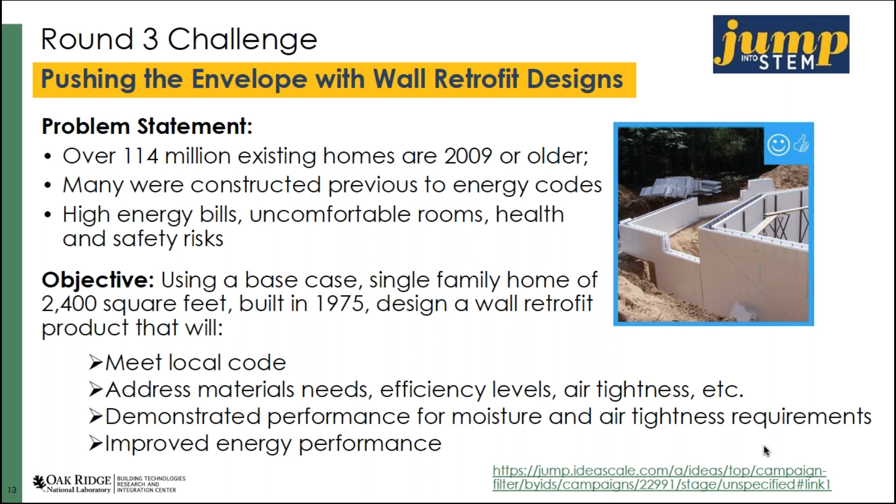So Chiaki, in a few minutes, will be talking a bit about some of the basics on walls and envelopes. This will help you ideate and understand the marketplace out there and the need for solving this challenge.

So what is the schedule for the round 3 challenge? It opened on November 1st. Ideas are due by February 8th by midnight, or 11:59 p.m. East Coast time.

And to help you, definitely review this webinar. This is webinar 1. We've also got webinar 2 scheduled for next week, December 11th at 11 a.m. East Coast time, with Jonathan Benziri from NYSERDA, the state of New York, where he'll be talking about some of their experiences in trying to design wall retrofit solutions for the building stock in New York State.

We will also have a webinar in January. This has not yet been scheduled, but it should be in early January with a practitioner from the field. So check back when we get that scheduled. All of this information will be posted on...

jump.ideascale.com. So with that quick introduction, I'm going to ask Chiaki to speak about envelopes.

But before he does that, let me do a little bio for him. Chiaki is the research engineer with the National Renewable Energy Laboratory, NREL. As part of the Building Energy Science Group, his research focuses on the application of fundamental heat transfer and materials science principles to the development of novel, high-performance building components.

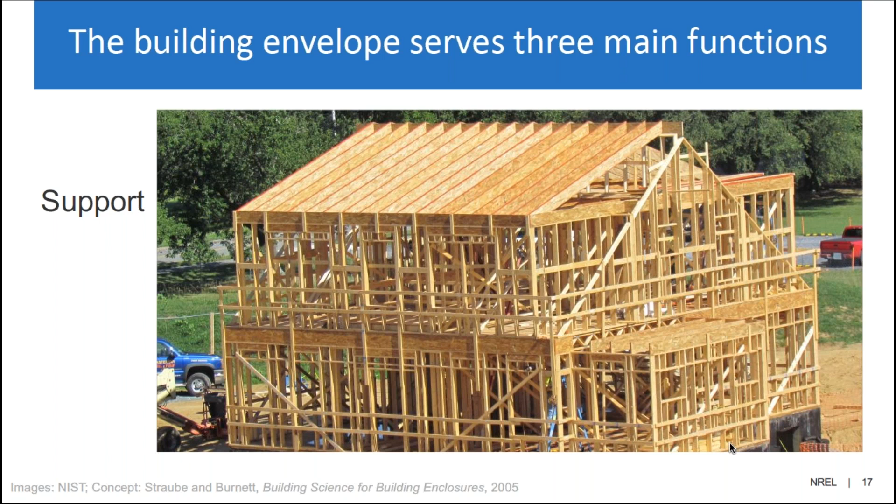The next function is control, the portion of the envelope that manages the environmental loads. It separates the interior environment from the exterior environment, managing the flows of heat, air, and moisture between the two. It's the thing that tries to keep you warm inside in the winter or cool inside in the summer. It really enables the main function of providing comfort inside the home.

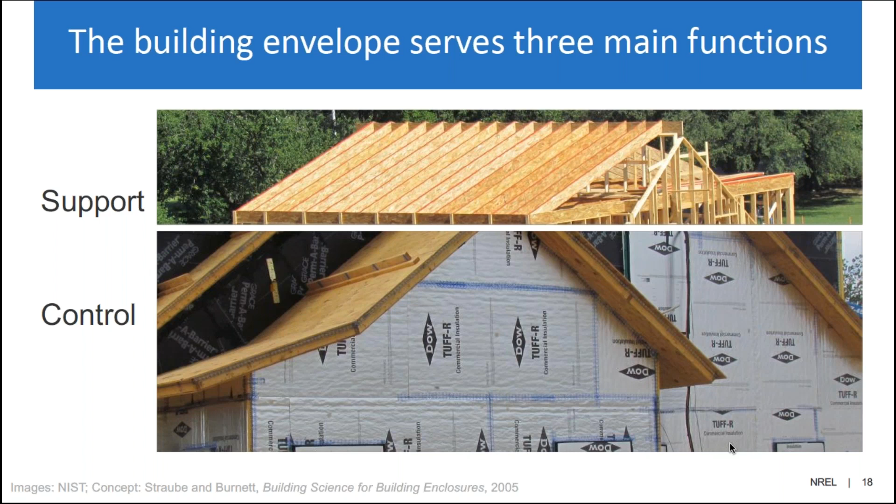The final function is finish—the part you actually see and experience. It's the siding, the windows and window frames, the trim, the roof material, all the things you see when you look at a home or any other building, from the inside or outside. That's the finish component. It's often forgotten in discussions about building envelope energy performance, but it's a key feature because it's the thing you see all the time and appreciate. It provides the architectural appeal of the building.

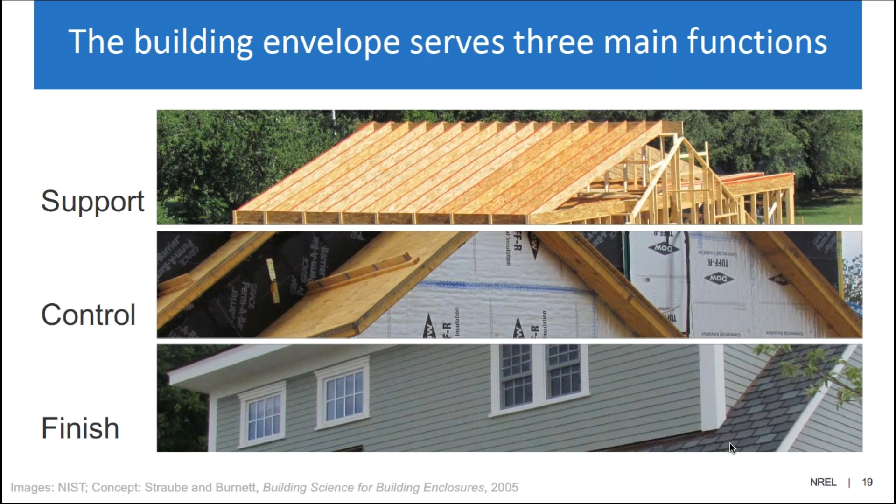Diving a bit more into the control function, that's the part of the building envelope most strongly related to energy use. You can think of the building envelope as the element that separates the indoor environment—the place you spend time, where you want to be comfortable, with conditioned air, cooled or heated for thermal comfort—from the exterior environment: protection from hot or cold air, humidity in hot, humid climates, and solar radiation, including visible light when you want shade, as well as ultraviolet and near infrared light.

It also protects from wind and what wind can bring with it—particularly driving rain and driving snow—as well as airborne contaminants, whether volatile organic compounds (VOCs), particulate matter, or other environmental airborne pollutants that you don't want to be breathing or interacting with.

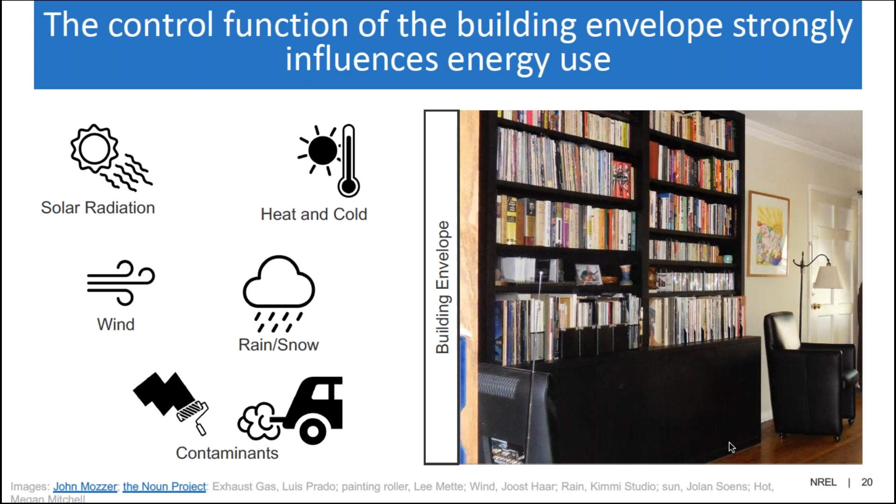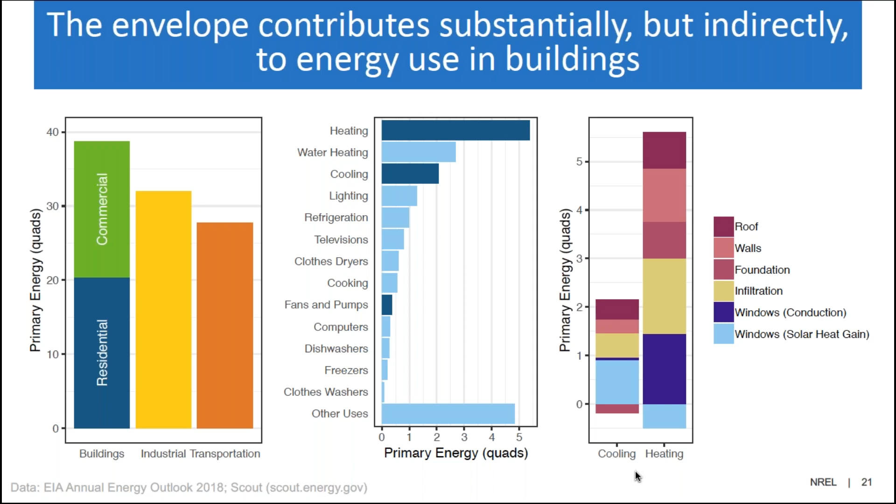All of this energy use associated with the building envelope comes from heat and mass transfer. Both move energy along spatial gradients, from high concentration or intensity areas to lower ones. In heat transfer, that's moving energy from hot areas to colder areas. In mass transfer, within the envelope context, we're thinking about water vapor or humidity, which moves spontaneously from high vapor pressure areas to lower vapor pressure areas.

Going back to heat transfer, there are three primary mechanisms by which heat is transferred. Conduction is the mechanism by which heat is transferred through direct contact between two materials—for example, an electric cooktop with a pot sitting on the burner element. When the burner is turned on and heats the pot, it's heating it through direct contact between the burner and the bottom of the pot.

Convection is heat transfer through air movement. You might turn on a ceiling fan in your bedroom on a hot day to feel cooler—the air movement across your skin is convection helping you feel cooler, giving the impression the space is cooler than it actually is. Convection is also typically used when a fan is associated with some heat source.

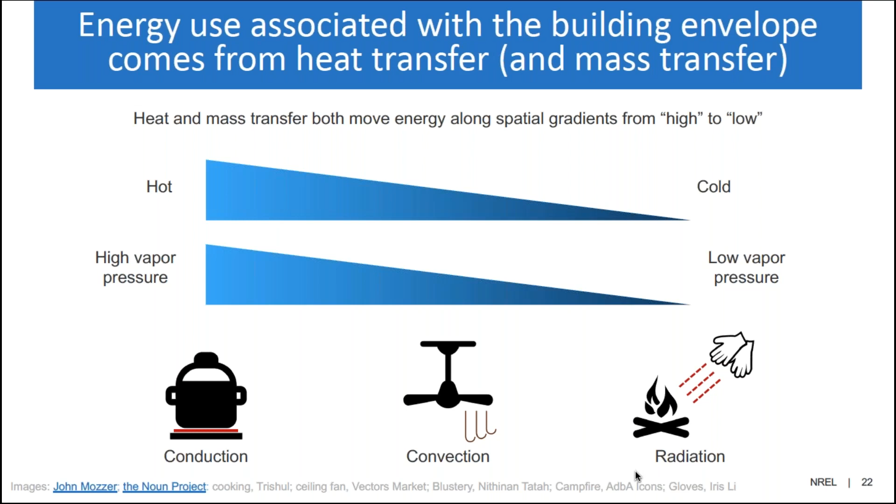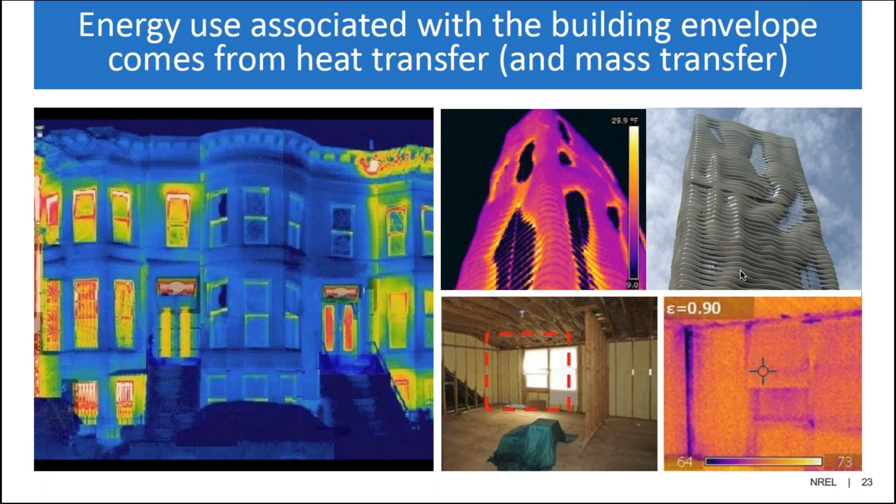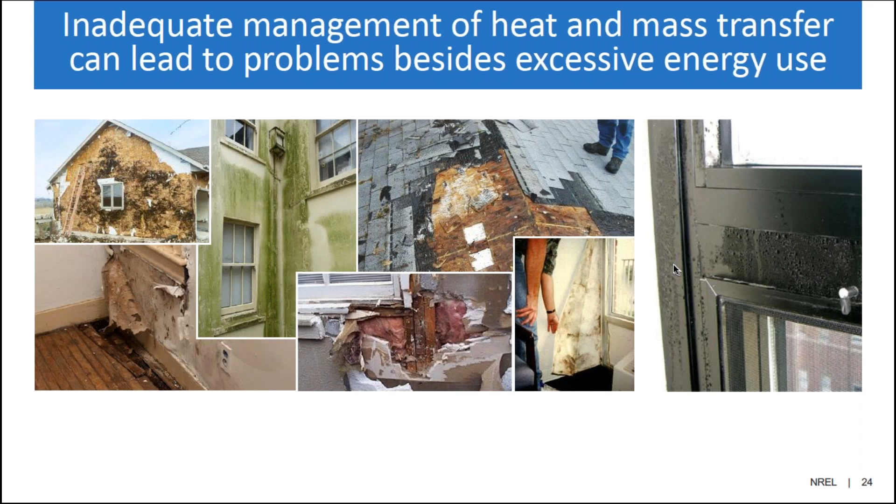So when you're not managing moisture and heat effectively, it can have consequences not only for the structure and physical performance of the building in keeping decay at bay, it can also make people feel unwell. Sick building syndrome is a well-documented problem that occurs when indoor air quality is negatively affected as a result of inadequate control of some of the contaminants inside a building.

When you think about a building, particularly a very high performance building, you've done a great job of insulating, sealing out the outside air, preventing infiltration, and you've developed this phenomenal high performance building. Then you say, well, now we have very small heating or cooling needs because we've kept out all the unwanted heat losses coming from outside. So now we have a downsized heating and cooling system, or we don't run it as often, or we don't have as much ventilation.

So all of the things in the building that would normally have left through infiltration naturally, leaking out through the facade, or being circulated as a result of more regular operation of a much larger heating and cooling system, those are now staying inside the building much longer. And so you can have consequences for the health and safety of the building occupants as a result.

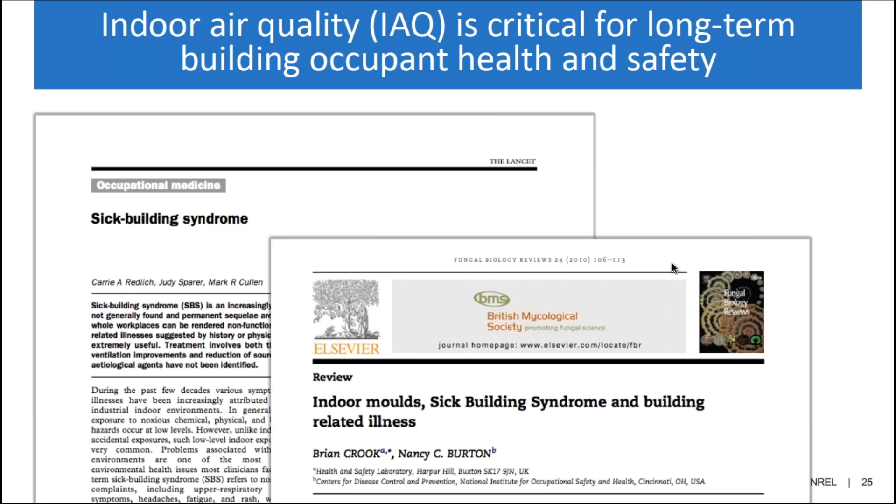There are a wide range of contaminants in buildings that can lead to indoor air quality problems. As some examples, you can have ozone. Ozone is not as much of a problem typically in residential buildings as in commercial buildings. The major driver of ozone generation is often laser printers and copiers. And it has a sort of distinctive smell that if you've ever spent a lot of time in a Kinko's or a copy center or any room that has a lot of copiers or printers operating in, you kind of know what that smell is like. That can accumulate in buildings, particularly if you don't have good management of your airflows.

You can also have accumulation of volatile organic compounds or VOCs. Those can come from paints and solvents. They can also come from synthetic furniture or fabrics and chemical treatments that are applied to those, like flame retardants applied to upholstered furniture, for example.

You often will have moisture sources. This is particularly true in some types of commercial buildings and also in residential buildings where, if you're cooking, if you're boiling water, that steam coming off your pot is going into the air as water vapor and then becomes a moisture source in the building. Also, anytime you take a hot shower, the steam coming off of your shower is additional moisture that you're adding to that indoor environment that you're going to have to manage somehow.

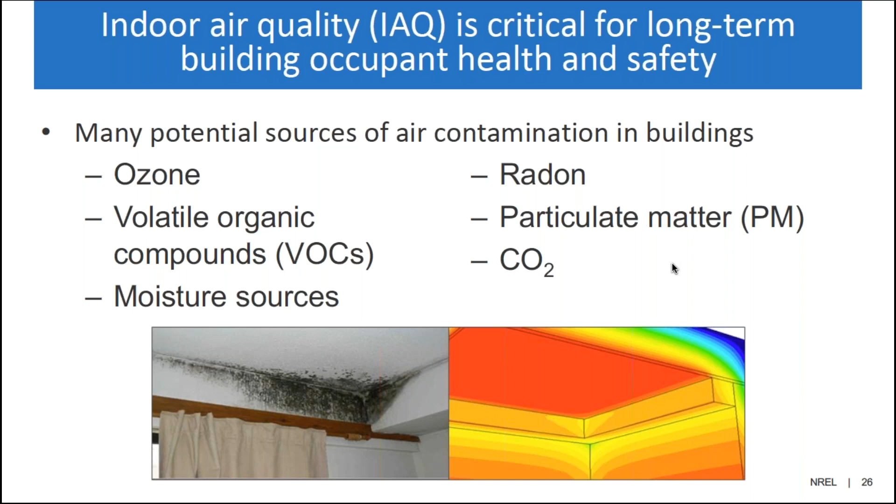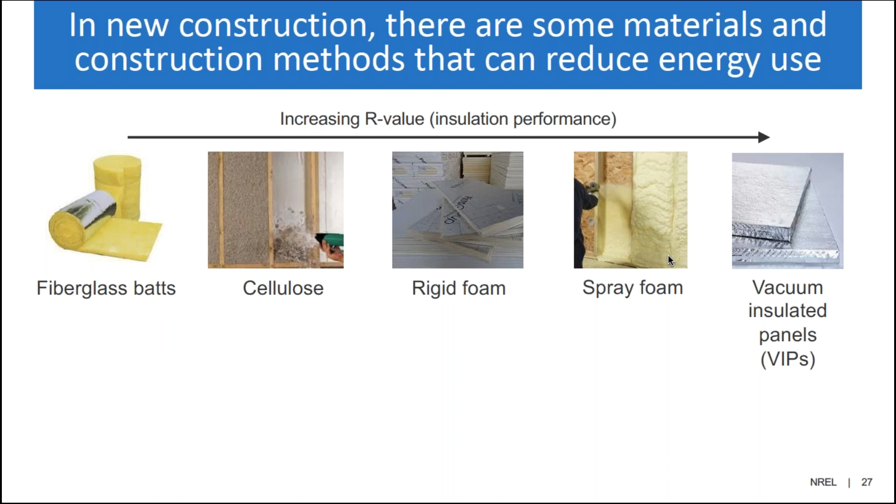The positioning of these layers of vapor control and airflow control are important to keep in mind because they are climate specific and they're specific to the configuration of the building that you're looking at. And so, and I'll talk about this a little bit more later, you need to be sensitive to where those layers are placed depending on the climate of the home that you're retrofitting. If you're in a hot, humid climate, the way you position the layers of insulation, the layer that controls the vapor transport, and so on, may be different than in a cold climate or in a temperate marine climate.

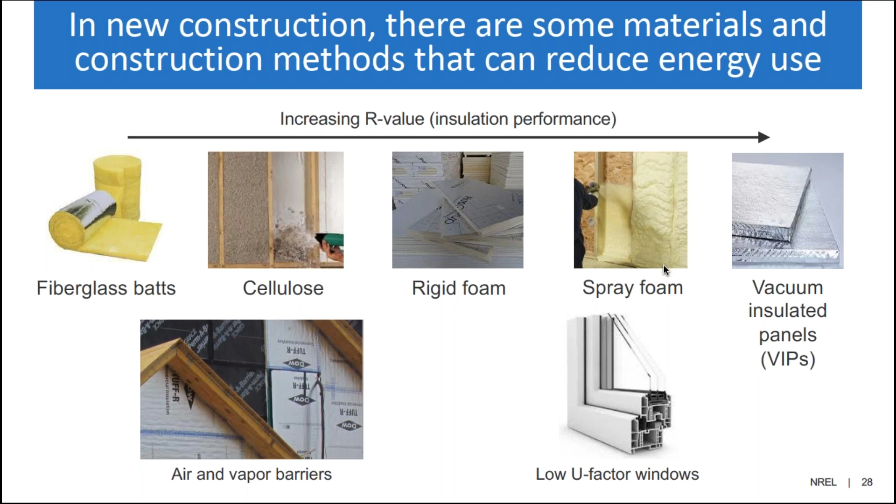So there was not only the labor to actually install the new insulation, the new vapor barrier layers, but also all of the tear down to remove the old exterior and put up a new exterior. It ended up being a lot of labor to get all of that to happen, even on a relatively small home.

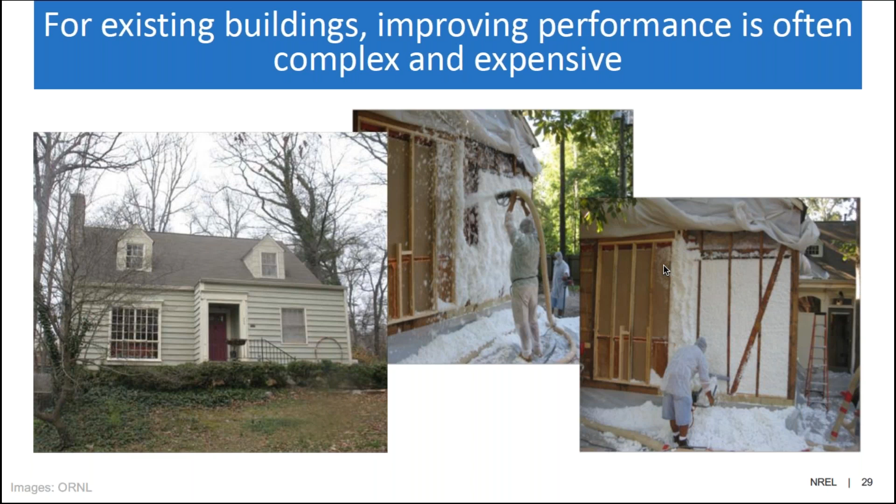So when we think about retrofit solutions, it's important to keep in mind that not only do they need to be high performance and cost effective for the homeowner, they also need to be desirable. They need to be appealing, particularly visually appealing, and they need to be a low effort, low commitment process to actually get them installed in the home.

When you think about any type of retrofit or remodel that a homeowner might undertake, you want to really lower the barriers to entry and make it something that they want to have as much as possible, as opposed to simply making it an economic decision where they're saying, oh, it saves me money on my energy bills and it pays back in X number of years. That's certainly compelling to some homeowners, but you'll get more homeowners engaged if it's easy for them to adopt and something that they want to have.

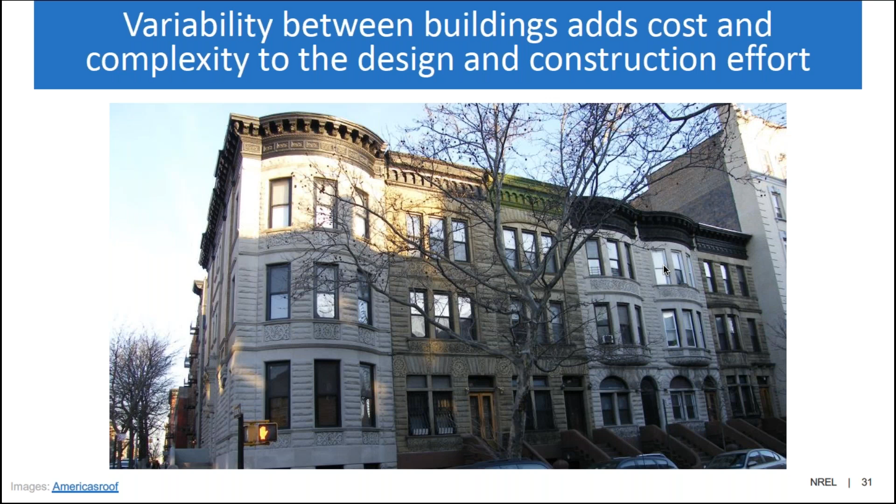That's not what most residential streets in the US look like. They look more like this, where every single home has a different shape, a different size, a different number of stories, different materials they were built with, built at different times, different numbers of retrofits or modifications since they were built, different states of repair. All of those factors come into play when thinking about making a retrofit on a residential building, a single family home. You need to be sensitive to and cognizant of all those factors that can influence whether your solution is effective and how much it costs to install.

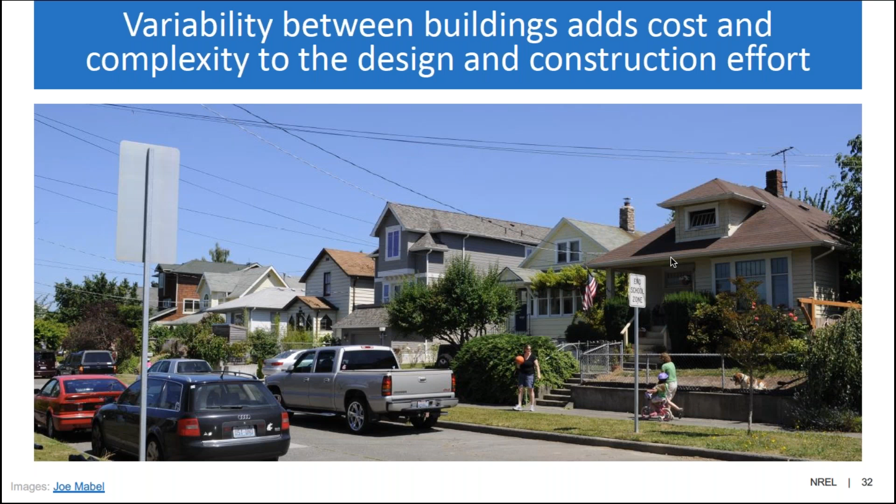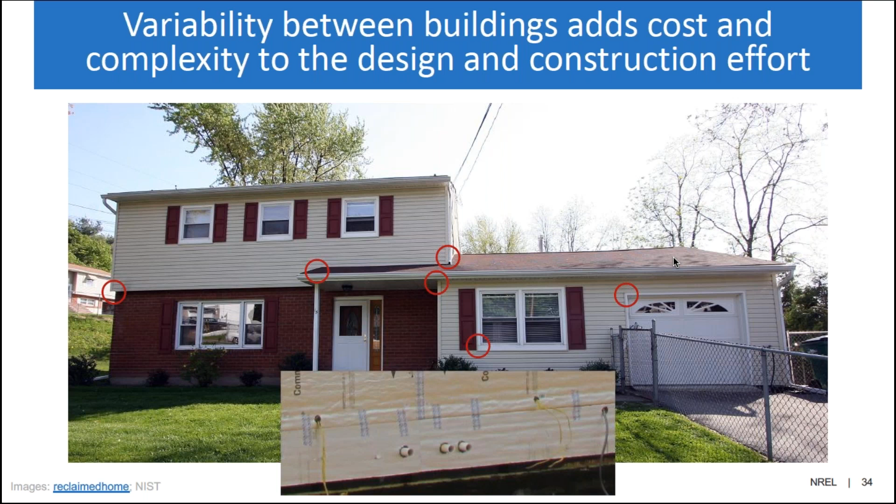So I wanted to give some closing thoughts about the challenge and things that you should keep in mind when you're putting together your proposal or your solution.

To the discussion I was just having, think creatively about dealing with interfaces. There are a lot of them, even in a relatively simple building, but they're very important to get right. Strategies that you can use to reduce the complexity and the labor effort and the risk of error around those interfaces, I think are really something to think about.

Maybe it means using laser line scanning or other scanning systems to automate the production of a window frame surround so that you know it's dimensioned correctly, or using a drone mounted imaging system to collect data about the exterior facade.

Maybe it's using additive manufacturing to assemble custom inserts or custom fittings and trim pieces to help bridge the gap between the retrofit components that you're proposing to put on the envelope and any existing components that you're leaving in place.

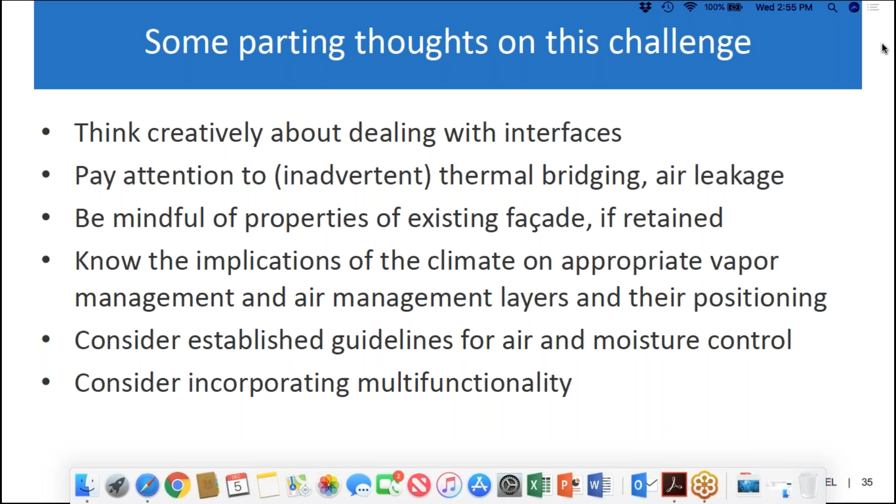And then finally, think about if there are any ways that you can incorporate multifunctionality. What that means is the envelope has those three major functions, but that doesn't necessarily mean that's all the envelope can do—that's just what it typically does today. It's not inconceivable that you could incorporate sensors, actuators, or movable elements that are automatically controlled, or even a ventilation, heating, or cooling system integrated into the envelope that provides some benefit and energy savings because it's part of an integrated package. So think about ways to incorporate multifunctionality to get additional benefits you wouldn't get from a traditional envelope system or traditional envelope retrofit.